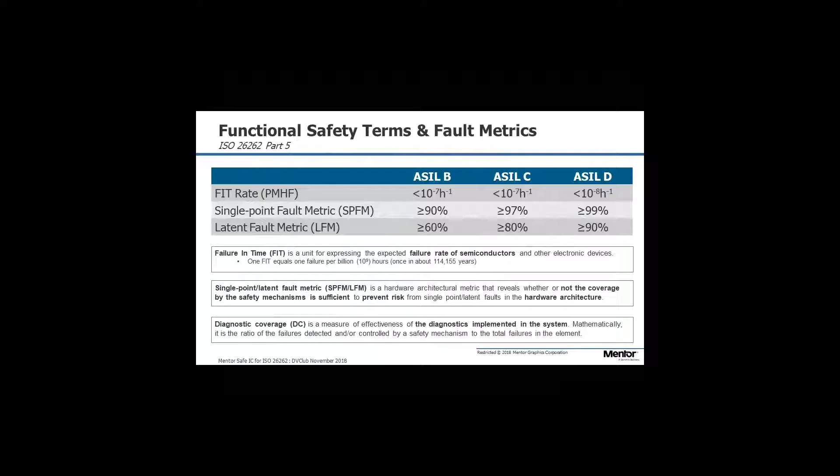Latent faults are an example where we have two faults and they interplay. The best example I can think of would be if we have a fault in the safety mechanism and a fault in the logic that safety mechanism is protecting - that would be deemed a latent fault. The chance of that happening is less, certainly within a given time window, so that allows us to have a lower diagnostic coverage for latent faults.

Our approach to this is what's sometimes called Mentor Safe, an overarching goal or approach for functional safety. Today we're talking about the ISO standards, with a particular focus on 26262.

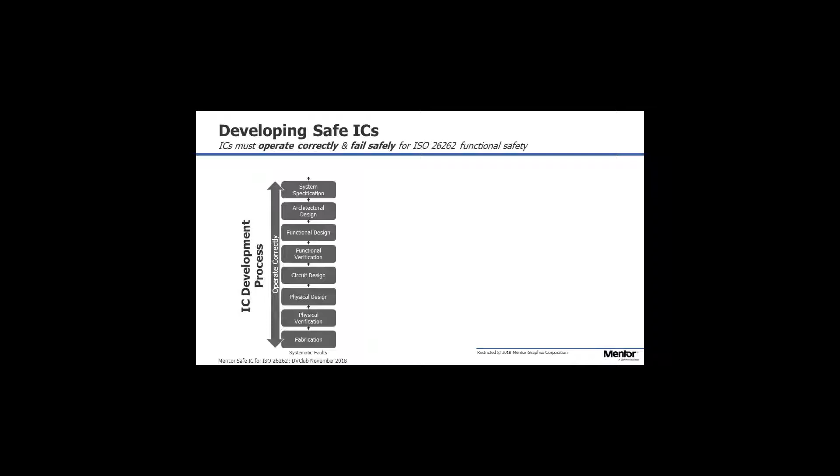If you're developing a safe IC, the first thing you have is your typical IC development process, something we often talk about with various aspects in DVClub. But we extend that for safety with a parallel process we refer to as a safety development process. The first thing to note is that because of the increased rigor we need, due to the cost of failure, we typically drive the verification or development through requirements.

As well as that - though I won't talk about it today since we're short on time - there's also a requirement for tool qualification. We need to use tools that are safe for systematic errors, so we're not injecting any errors into the process. So we typically develop our product in much the same way you'd develop any product that operates correctly, but with greater rigor.

On the safety side, there is a parallel process that starts with planning, analysis, and defining things like safety goals. This is very much like verification, where you do analysis and come up with a verification plan to drive the process. Much the same is true for the safety development process, where you're looking to see how my design could fail.

It's failure mode analysis, then you look at the effects - what are the consequences of those failures? Then you need to decide how to mitigate that, through the use of safety mechanisms. And finally, you need to prove it - you have to demonstrate that those safety mechanisms will achieve the goals you set out, and that you'll get the diagnostic coverage you need in order to achieve your safety goals.

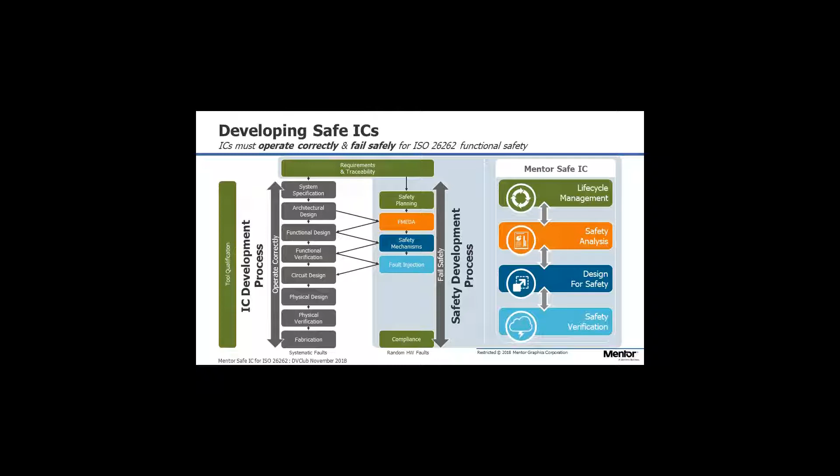So we call this our approach, or the solution that we provide for all of these aspects, Mentor Safe IC. I think this slide probably illustrates that best. There are 4 key components.

There's the lifecycle management, so we need to manage the process from planning all the way to compliance. We need to help manage the safety analysis and automate what is generally a manual process using things like spreadsheets, with safety analysis to set the safety goals. Once we've done that, we then would go into design for safety.

We now have a capability to automate this process of injecting, adding those safety mechanisms into the design, and then finally we need to prove it with some form of safety verification.

So lifecycle management, we've been able to leverage Siemens PLM's capability of a product called Polarion. That allows us to provide a full lifecycle enterprise solution from planning all the way to compliance.

We have safety analysis through the Austemper acquisition. We acquired some technology called Safetyscope, which has a number of capabilities to aid the analysis for safety.

After we've done the safety analysis, we can then use that to drive the automation of inserting those safety mechanisms, so safety synthesis into design. And then finally, we would then go into safety verification, where we need to prove those safety mechanisms are doing what we set out to achieve.

And what's interesting, we've added to our formal Veloce and Tessent capabilities a fault simulator from Austemper called Kaleidoscope.

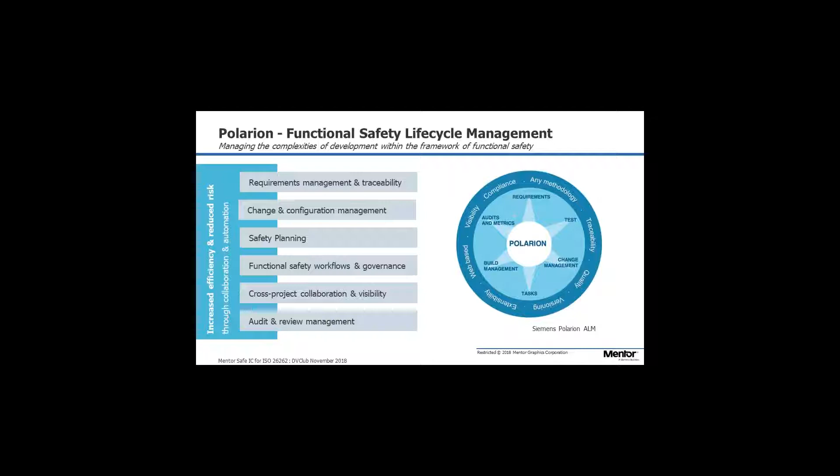This actually happened very early on after the merger, where we started integrating our next generation verification management with Polarion. There was a natural synergy. We were doing things and it made sense to use Polarion for capturing the requirements.

So what we've done from the Polarion environment, we will allow you to describe and capture all your requirements, and importantly the derived requirements. As you come down to something that's more atomic, less ambiguous, you will then export that into a verification plan using UCDB like we do today.

You can then do your verification, and what's important with UCDB, that could be on any of the engines, so formal for static, Questa for simulation, or Veloce if you're using hardware assisted.

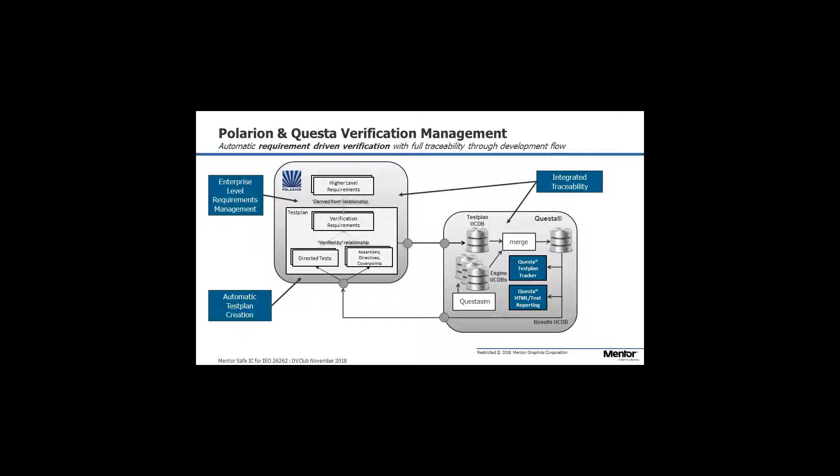You then export the results out of that platform back into Polarion, again using UCDB. And with that integration, that will allow you from Polarion to demonstrate that requirement has been satisfied, how that requirement was tested, and then most importantly, what the status of that test was.

Safety analysis, what we would do is take in the design, which we might describe as unsafe. That would typically start as RTL, but most likely at the end be at the net list level for various reasons about what's the requirements of 26262 and a mission profile.

The mission profile is used to compute fit rates, and I'm not going to go into details today. I have a slide just for your reference to talk a little bit about what that does.

But using that mission profile, and I suppose something to think about, if the chip is inside the passenger compartment, it will be very different than if the chip is on top of the engine. So when you're doing those fit calculations, there will be differences about the environment.

It will then guide you, and that's what's important. It's a guide, it is best case. This is early analysis in the beginning of the process, so it's best case, but it'll guide you where to insert your safety mechanism, so identify holes in what's called the coverage and contribution report, guide you where you should be inserting your safety mechanisms and what type of safety mechanism to give you the numbers that you require for your safety goals.

The fit example, I'm not going to detail today, but what's important is that we base this on IEC 62380, which is a standard for electrical and electronic.

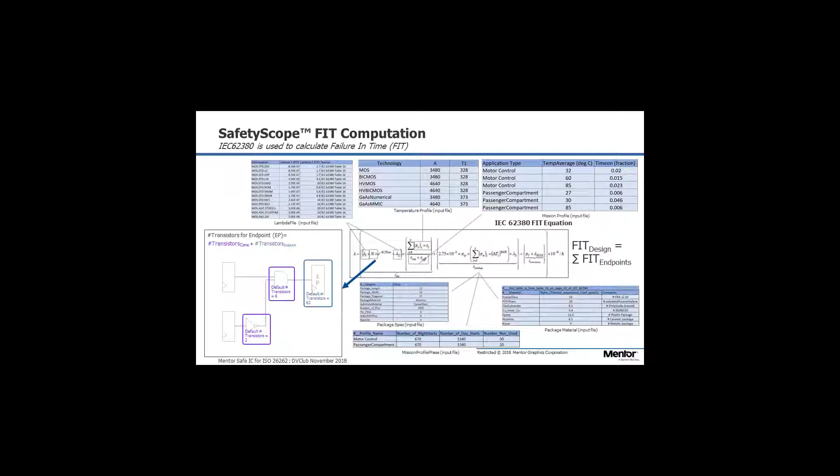So design for safety: now we've done our analysis, we have essentially a macro list which will tell you where you want to insert your safety mechanism and what type. Your unsafe design, we call the RTL, will generate a safe design, so new RTL with the safety mechanisms automatically inserted. It provides some verification capabilities to verify the safety mechanisms are working, and importantly provides scripts for a logical equivalence test to prove you have not changed the mission mode of the design.

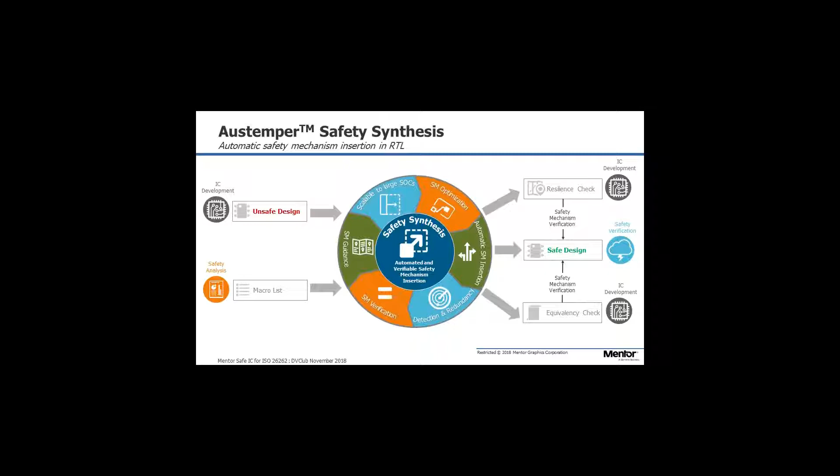There are different types of safety mechanism you can insert, and it depends whether you want the design to fail safe or to be error tolerant. So depending on what your goals are, in automotive you often see things designed to fail safe, so it's about identifying a failure and reporting that, whereas things like airborne electronics tend to be fault tolerant, so they maintain operation in the presence of an error using things like TMR, some fault redundancy scheme.

So the tools we have, not going into too much detail, there's ELIA and Radioscope. The point is, without going into all the things you could do, there are many different safety mechanisms you can employ, driven by your goals. Replicating and implementing things like lockstep is very expensive, it uses a lot of silicon. So there are different safety mechanisms you can put in place, driven by your safety goals, what you need to achieve, and ultimately driven by the ASIL level you're targeting for your product. With ELIA and Radioscope, think of it this way: Radioscope operates at the RTL level, things you can do to the RTL, whereas ELIA works at the macro level, working with modules.

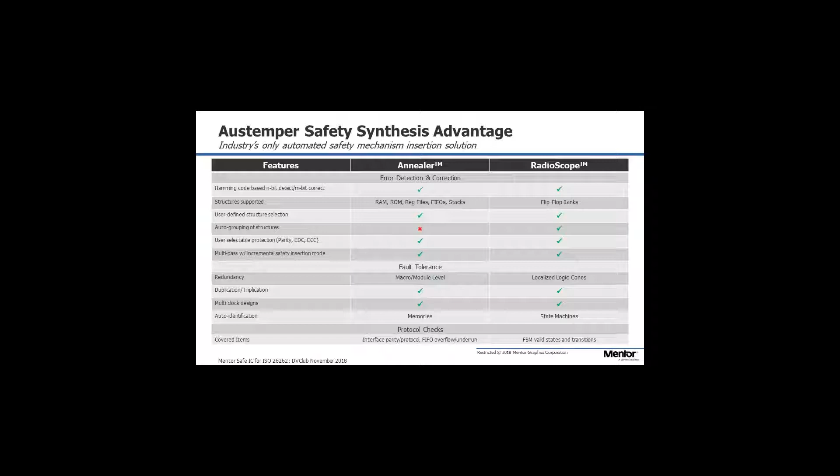Something to mention, we have Tessent BIST and BIST type testing, and this is a good example of where diagnostic type tests, built-in self-tests, work in conjunction with your safety mechanisms. A good example is a latent fault, where we might apply BIST to the safety mechanism for, say, a TMR scheme, and couple that with your safety mechanism, which allows you to mitigate for latent faults.

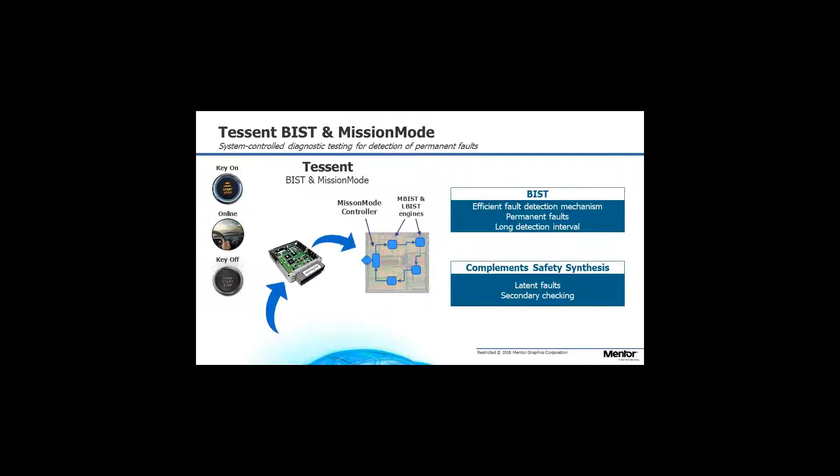So moving on to safety verification, we need to prove it, but before we go into that process, there's a fair amount of optimization we can do on the fault list. The fault list, for these chips, with the likes of NVIDIA now targeting automotive with very large chips, can be very significant. So there'll be some optimization needed to the fault list to optimize the process.

We do that in two places. One is SafetyScope, which does some initial fault list pruning. And as Mark Handover presented at this event a couple of years ago with formal technologies, we can use formal to optimize the fault list to identify things deemed to be a safe fault, for example. As well as that, we have a number of engines, including formal for actually doing fault injection, which we've talked about at previous DVClub events.

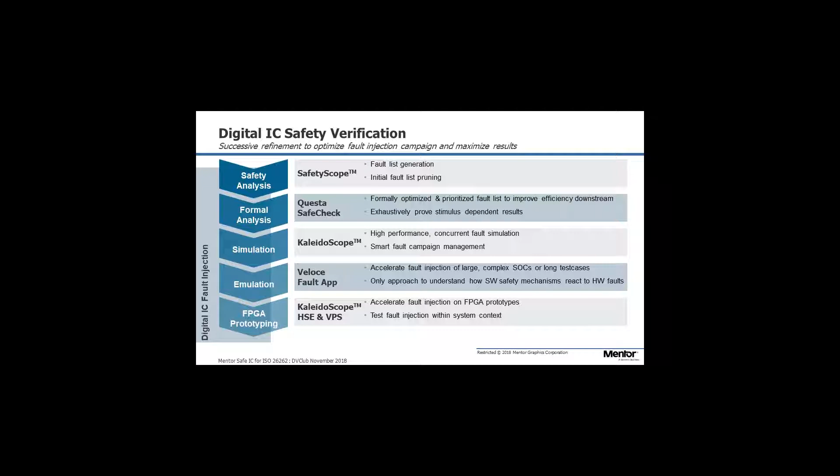Kaleidoscope is new, that's a dynamic simulator doing fault injection that we've acquired from Austemper. We also have the Veloce Fault app, Jagged's here from the Veloce team, that we've had European customers using. And with the Kaleidoscope acquisition, something called HSE, and depending on time we may get the opportunity to talk about that, where we actually embed logic into the design for the purpose of doing fault injection.

For fault simulation, we take our safe design, the design that has the safety mechanisms inserted. What's key is we have an approach where we can mix RTL and netlist. We need to use netlist for the standard because that's deemed closest to the silicon, but that's only for the part we're testing, the fault injection. So we can use a hybrid approach for things that aren't affecting that test, like stimulus generation, mixing RTL and netlist, simply done for performance reasons.

We'll gain a performance benefit if we can use a hybrid approach. Taking our RTL sims, essentially vectors into the fault simulator, safety alarms where we're expecting to see alarms being asserted, and importantly our fault list. The outcome of that will be alarm triggered, which is good. So that goes into diagnostic coverage, that's a credit for diagnostic coverage.

The error being masked means that we didn't see a change in the design, so that will be deemed to be a safe fault. The alarm was not triggered, so that's a bad thing, that's unsafe. And then there's the option of not resolved, where for whatever reason it hasn't fallen into those three buckets. An example of that could be the stimulus, so our RTL sims didn't actually toggle the node, so we've not tested that fault, and that would be considered unresolved.

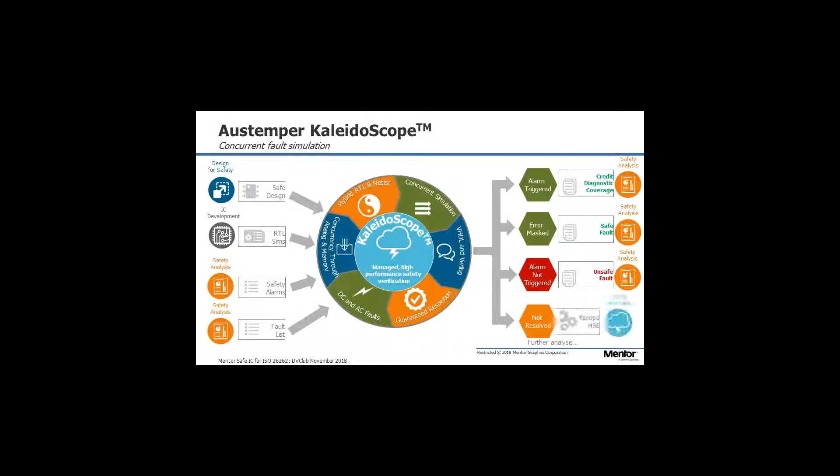So Kaleidoscope HSE - very briefly, this is a technique for embedding the fault. One reason you might do that, as in the example of the analog block, is you might use HSE in conjunction with our real number modeling capability. That would allow you to essentially inject faults into an analog block and see the impact of those faults being detected in the digital domain.

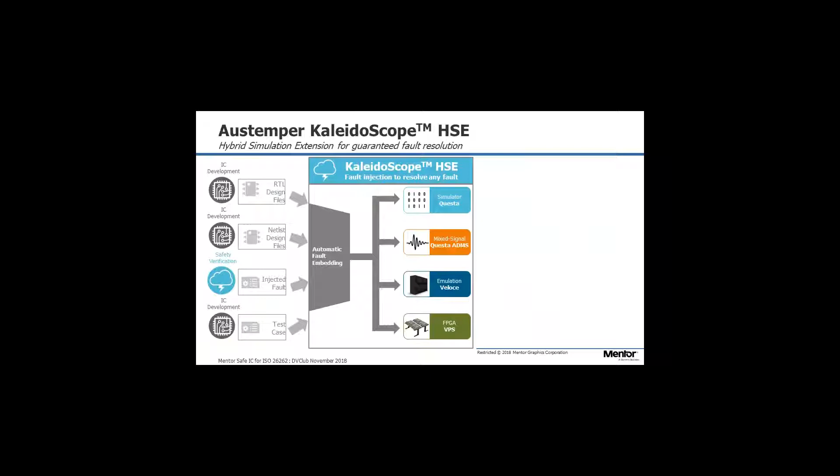I'm good, I'm ahead of time, Mike. I always think it's best to be ahead of time.

So in conclusion, really what I wanted to illustrate today is that Mentor Siemens coming together is a good thing, and that's really allowed us to address the whole problem. What we are focused on is providing a solution that will enable you to get to compliance, and the goal is to get to compliance in less time and less effort. So that concludes the presentation.

If anyone has any questions in the audience or online?

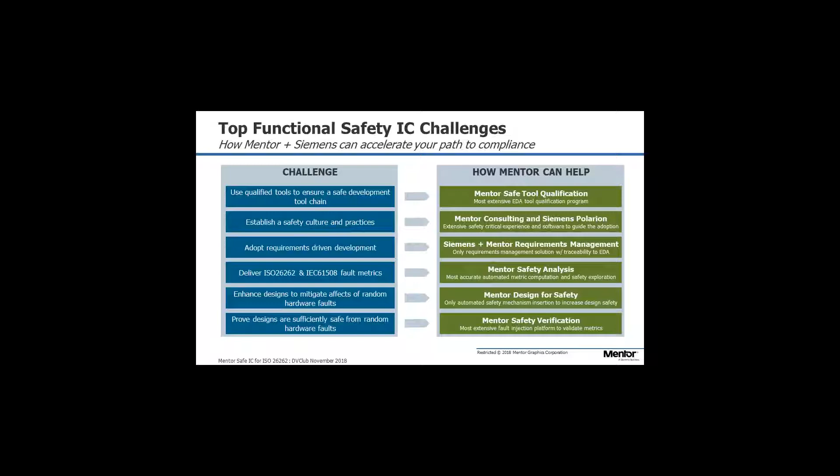So you say that you've got Mentor Safe Tool qualification. Are you qualifying every single revision of the tools that you release, or is it just specific ones? Is that Chris? Yes, that is Chris. Oh, hi, Chris.

Let me change my answer - there was one slide, and I always like to finish on time, so I didn't talk about certification. We do certify, and it is on a release basis. What we've done is a lot of QA, and then we have that QA back process and supporting documentation certified by TÜV SÜD. I think we're maybe on our third iteration, we've just done 10.7. All this information is available on SupportNet, so you can have a look. For a given version of Questa, or a given tool, you can download all the certification and information about what we've done in terms of qualification. And if you need more for your goals, we would work with you to ensure that you can satisfy what you need to do, which is to prove that the tools you're building your chip on meet the requirements for 26262 compliance.

Okay, so you're doing 10.7 - are you doing 10.7a, 10.7b, 10.7c, or is it just 10.7? I would have to check what the details are regarding the minor releases - we would deem those to be minor releases. I would have to check, and that information would most likely be on SupportNet. That's a good question, I can find out for you, Chris. Brilliant, thank you. Thanks, Chris.

Now we know who you are. Okay, and thanks to Alex as well for finishing on time. It's always good when speakers finish on time. He's an old hand, so he's very good. So a big round of applause to just say thank you to Alex.